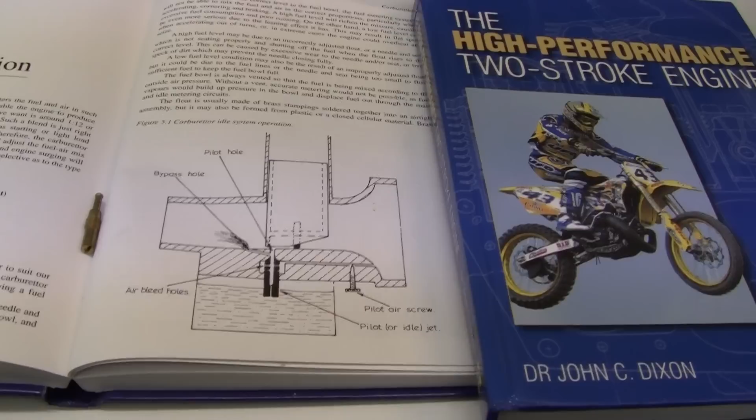Now here in video 2, we're back in the shop, and I'm going to show you exactly how the slow jet works and how it's adjusted. I'll explain it in theory and also in practice. I'll go very slow, trying to think of a person that has never done this before, and what I need to say.

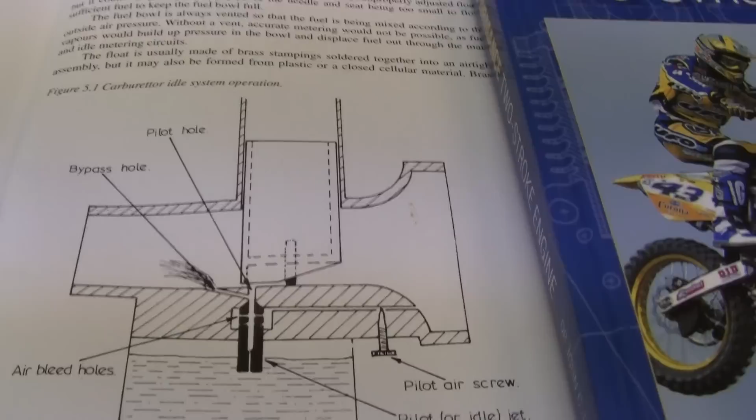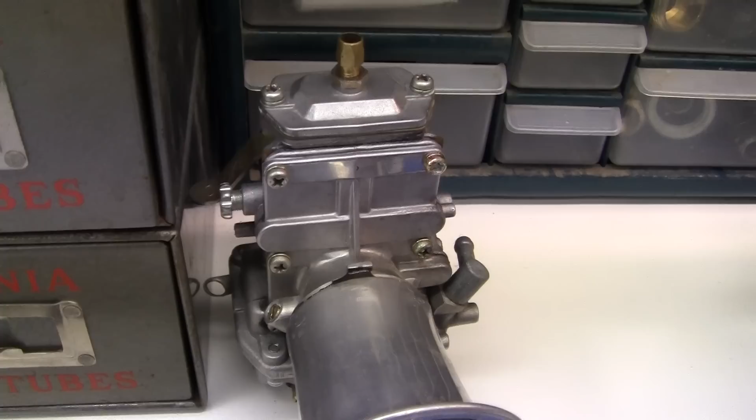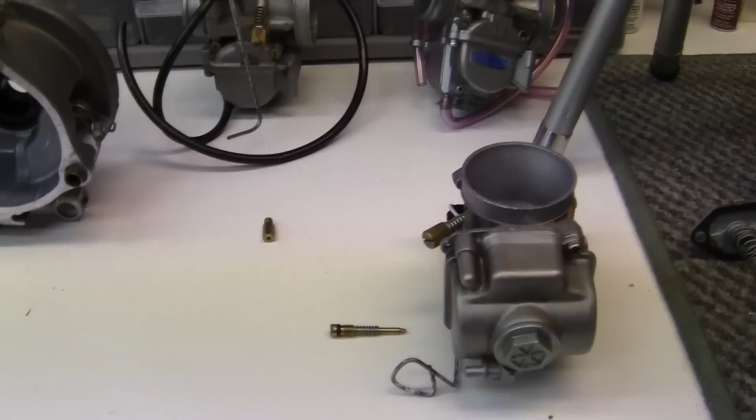Remember this: in carburetion, to control a thing such as a carburetor or the engine, we have to fully understand it. There are plenty of books out there on carburetion, or on the net, and they all describe the same thing. I showed you different carburetors, and I have four of them right here: a Mikuni 28 flat slide, an OKO 30 Sudco, a Keihin 28, and an OKO 28. They're all a little different in casting variations, but they all do the same thing. They all have the same adjustments.

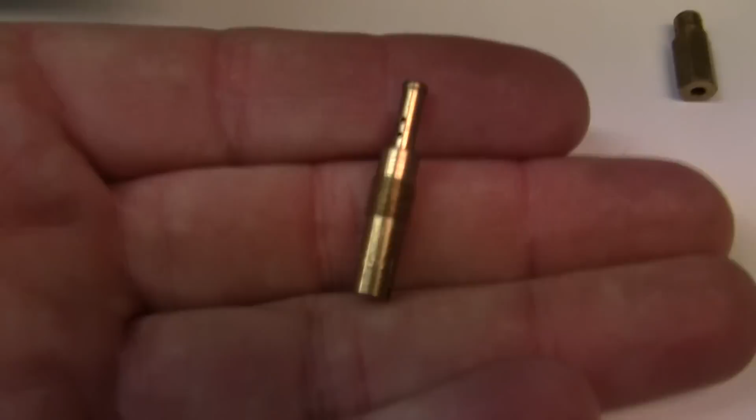Now, this is your pilot jet. You have a pilot jet and you have a main jet right there. Your pilot jet controls 0 to 1/4 throttle. Your main jet will go from 3/4 to full open.

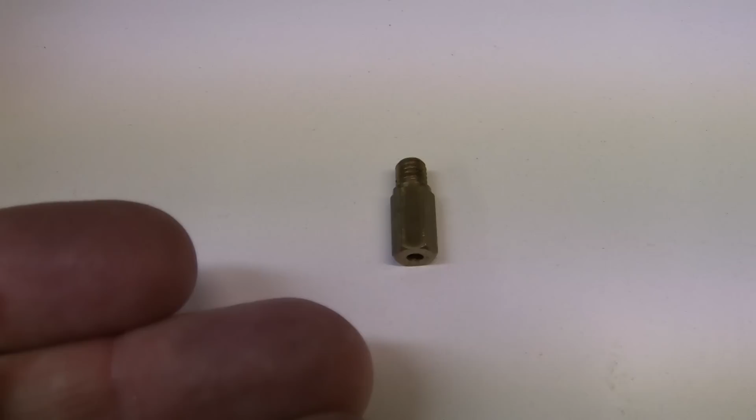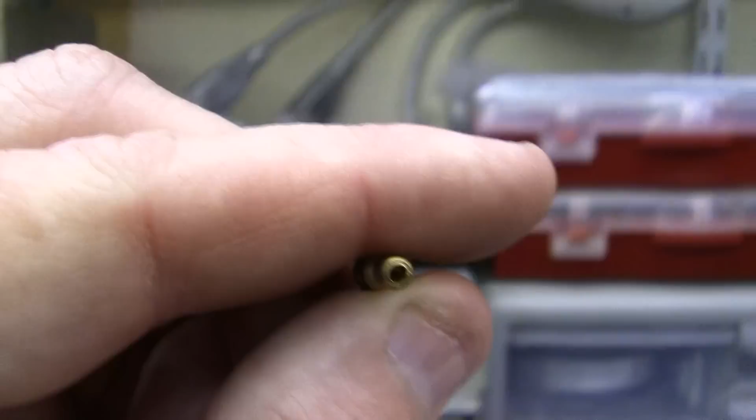Now, adjusting this is a little tricky. These come in different sizes - if you'll look, you'll see it has a number on it. The larger number can mean a larger size orifice or hole. So look at that, yeah, you can see through it. And a smaller size may mean smaller.

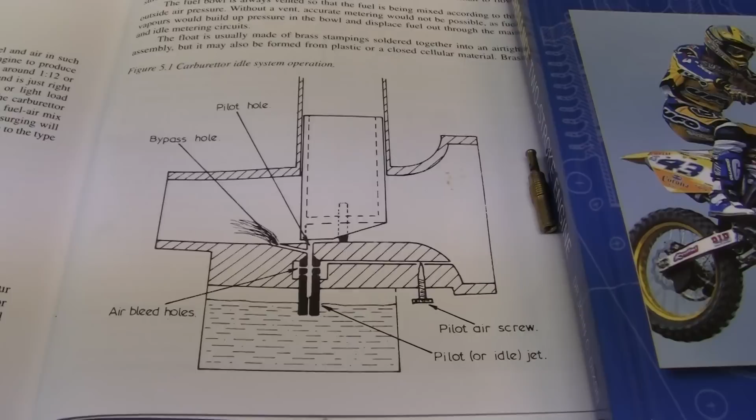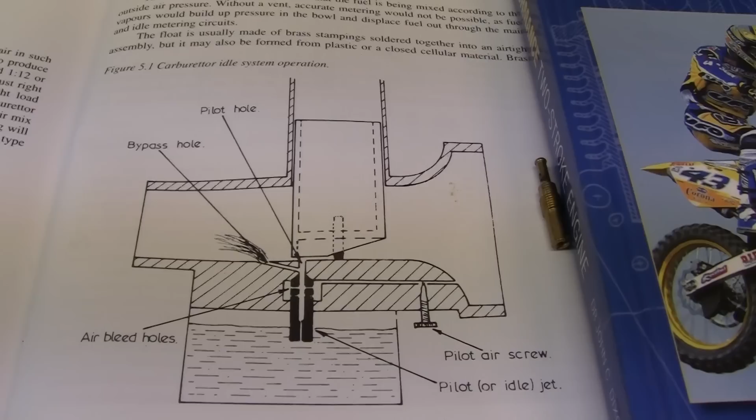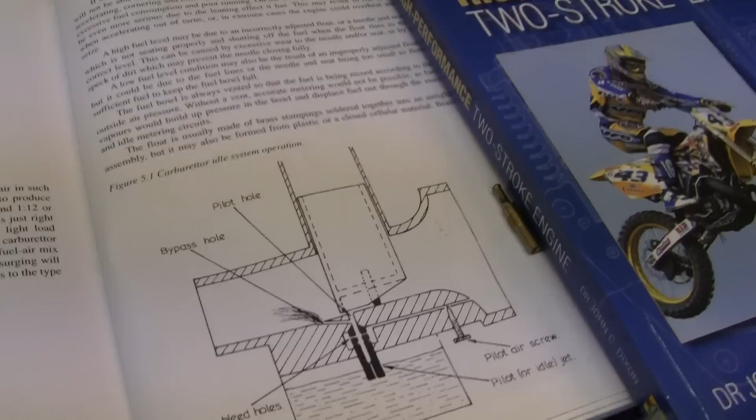Alright, then we have to adjust it. Now people ask, well, it's just a little jet, what's the big deal about it? Well, I'll tell you, if it's not working right, this is what happens: you will gun your throttle like this, and all of a sudden it'll go, and then it'll go wide open - it will stutter on you. Now, if you're taking off from a stoplight, or outrunning cops or the German police, you don't want your bike stuttering. That's what happens when you don't have it adjusted right.

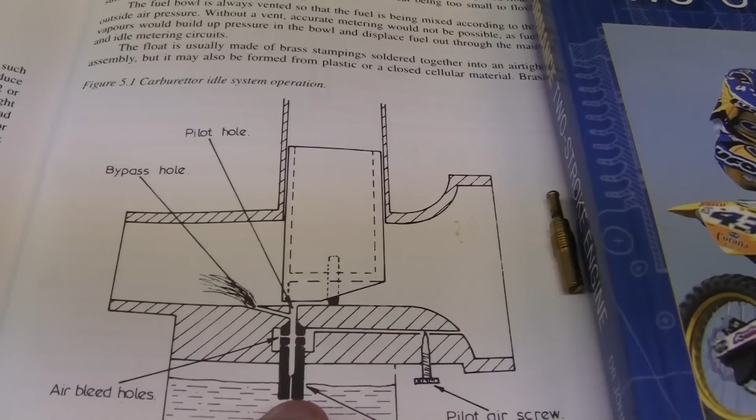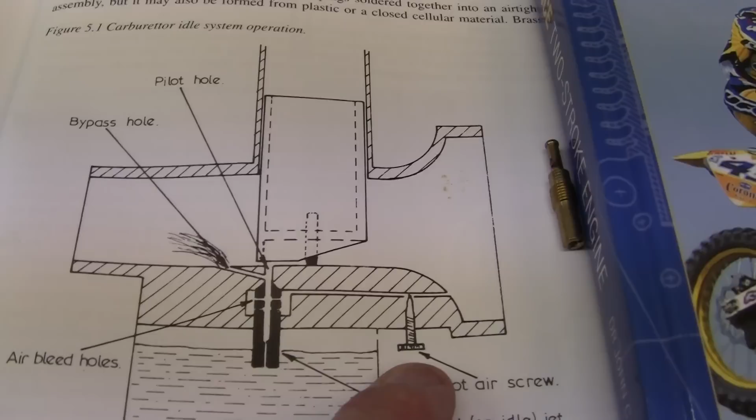There is only one adjustment, and you can see the screw right here. Both the pilot jet and the main jet are stuck in the float bowl, full of fuel. This controls your pilot jet. What it controls is the air that goes into the mixture. And like I've always stated, it'll say right here: running condition, mixing ratio by weight, fuel to air.

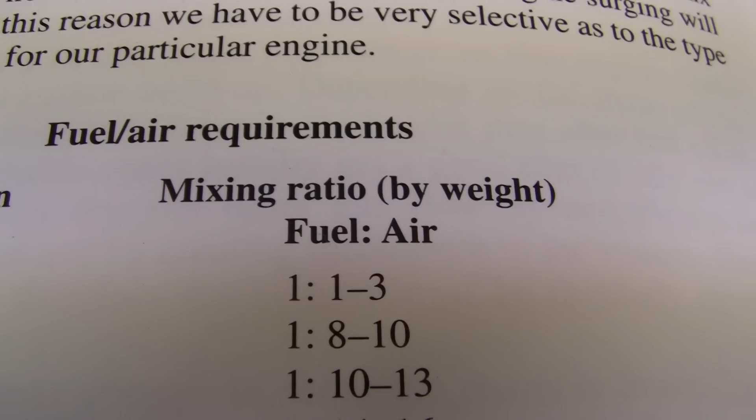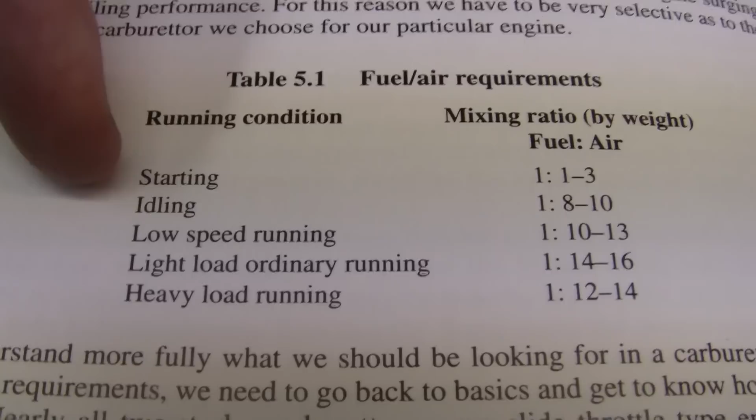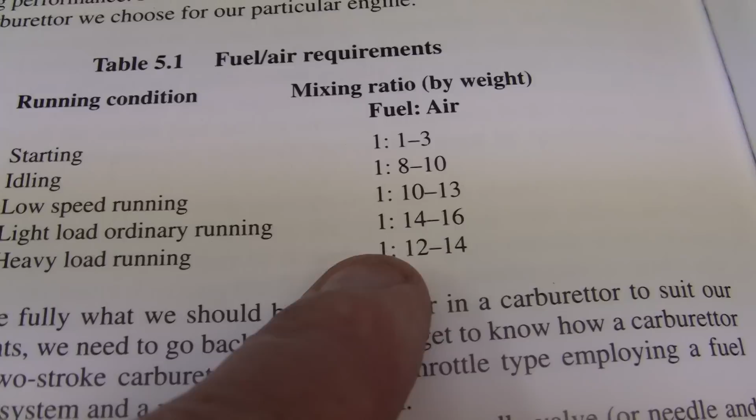Your starting ratio should be 1 part fuel to 3 parts air. Your idling, which is what we're dealing with, should be 1 to 8 or 10. Now wide open, your heavy load running should be 1 to 12 or 14 - 1 part fuel to 14 parts air.

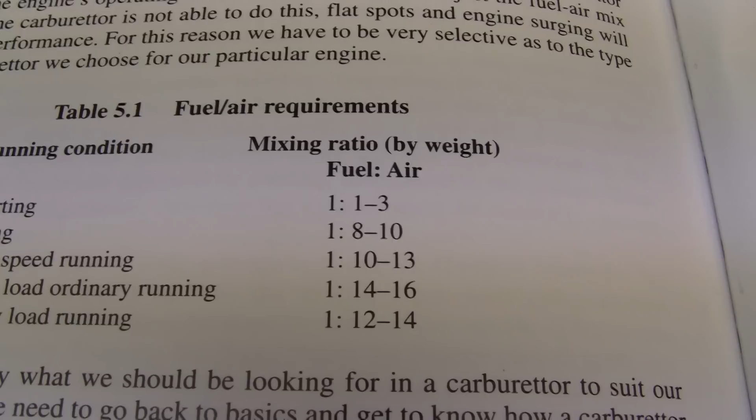So we're not adjusting the big jet, we're adjusting the pilot jet. Now, if you have too much fuel or too much air going through the jet, it makes it stutter, and we can't have that. Now that being said, and this is going to be definitely a few parts, remember...

We've got to back up for just one moment. This is a Dio SR50 engine case, and I brought it out for a reason.

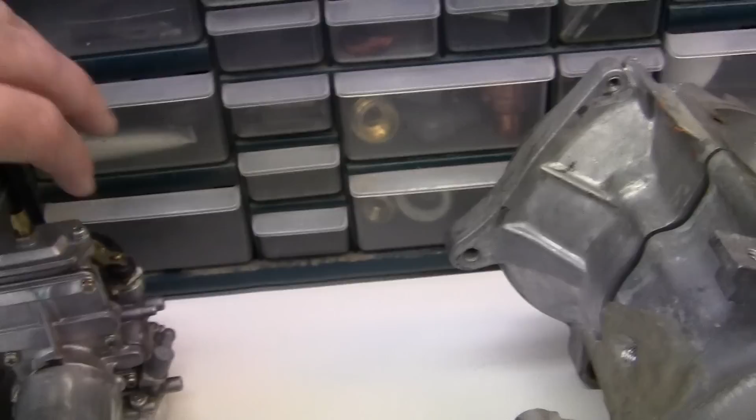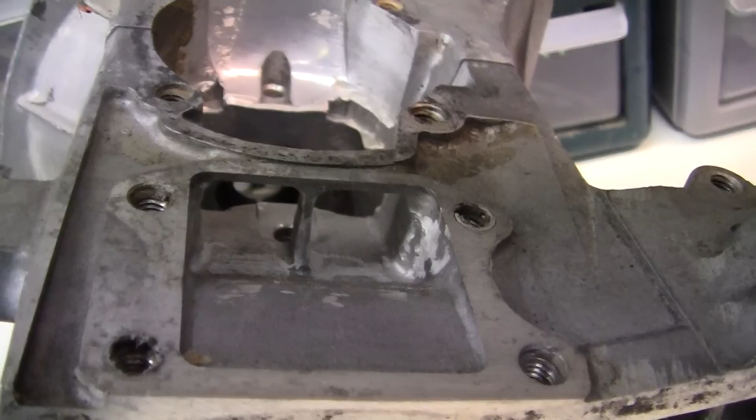Now, when you get your carburetor on here, say you get your carburetor on right here, okay, your air and your fuel are mixed here. They go into your intake with your reed valves here. They go into the engine, and then they come back out.

Let's consider this engine to be an air pump. All engines are air pumps. They pump air and fuel through them.

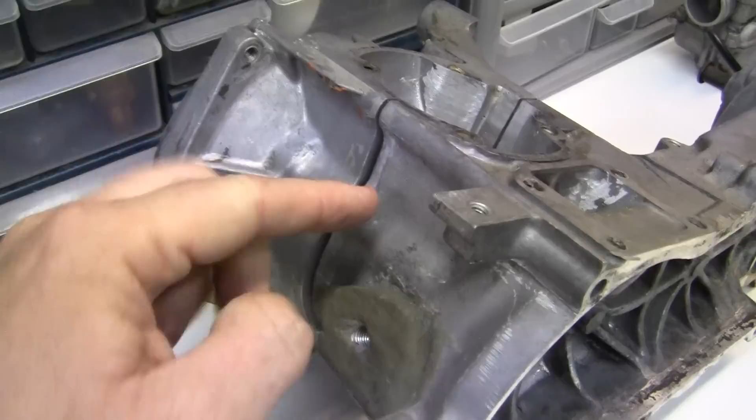But the one trick about this - now this is understanding theory - is that you can have no leaks in your air pump. Okay, these are where the case halves come together. This is where air can leak. Air doesn't leak out, it leaks in, and I'll get to that. This is another spot where it can leak, right around here - air leaks in. Another spot is right here where it connects.

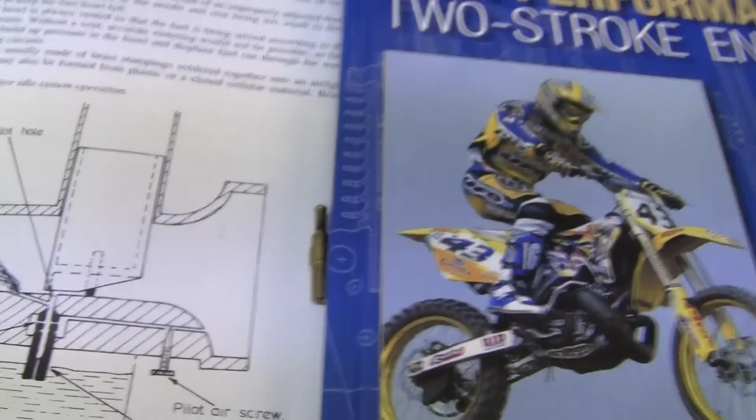Now, the carburetor is a metering device. You're on your idle, right? Right now, okay, your bike is idling. Now I'll do this when I get my other bike running. Your bike is idling - what it should do with a sealed air pump is the pilot jet lets in a certain amount of air and fuel. That motor should idle all day long. Okay, if your motor cannot hold an idle, no amount of adjusting that carb will make it work.

If it doesn't hold an idle, then you probably have a leak, and this is the way you can tell: if you start your bike and it works fine, and then it works fine for a couple minutes, then it starts to stutter - da-da, da-da, da-da, da - and then it stops. What's happening is your air and fuel mixture is being contaminated by more air that's coming in through the leaks. Now what this does, think about it, more air and less gas leans the mixture out, so that as time goes on, you have more air and less gas, and your engine leans out and stops.

The way to fix that is get yourself a spray bottle right here, put some soap and water in it, and as the engine's running, go around all the places it could leak, and if you see air bubbles, then you've got a leak. Okay, now say if it doesn't have a leak, then we'll go on to adjusting the air fuel.